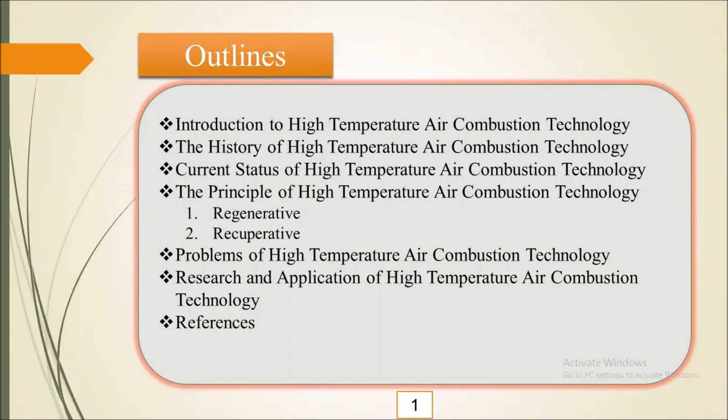So what is high temperature air combustion technology? Abbreviated as HTAC or HITAC, it is a process with which we are taking advantage of the heat present in flue gases after they do the work in a gas turbine, for example, or in a furnace, and which leave the furnace or the gas turbine with high temperature. So this high temperature has high enthalpy, so we are taking advantage of such heat to transfer it to preheat the air going to the combustion zone or combustion chamber.

This technology is very important because of its benefits. For example, it will save energy, almost 30% of the energy, because if we take, for example, the gas turbine, about 70% of the amount of heat supplied in the combustion is wasted in the form of flue gases to the atmosphere. So using such a heat exchanger will give us an advantage of saving fuel and energy. The second one is the flame stability.

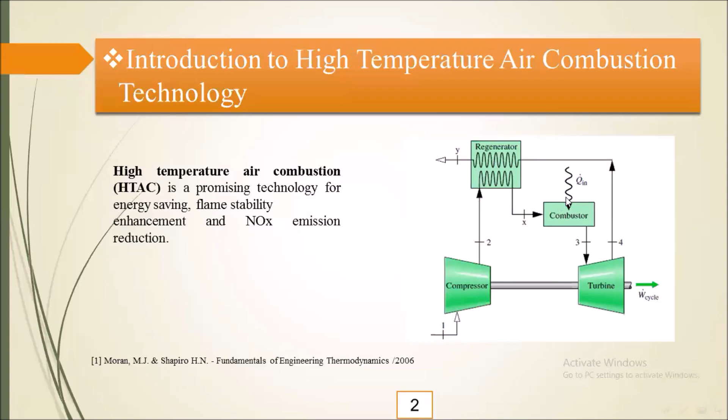So the history of this technology: it has been developed since 30 years ago, and it has been using low heating value fuels. So as we said earlier, the excess enthalpy present in the flue gases is wasted to the atmosphere. So we are making use of such enthalpy, and we are using it in a heat exchanger to increase the temperature of the air before it goes to the combustor.

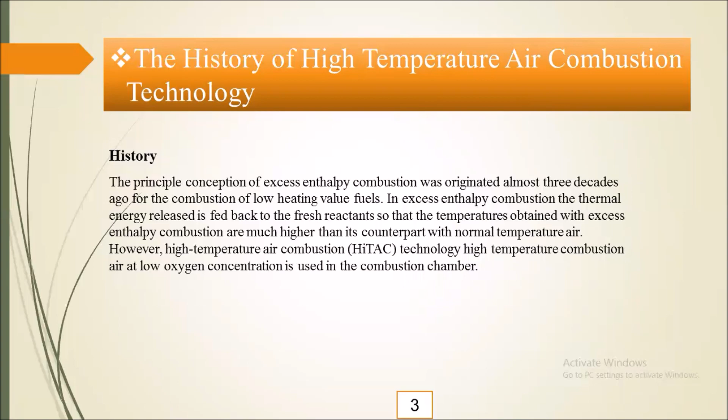So here let's talk about the current status of this technology. This technology is one of the promising combustion techniques that will give us a solution for the energy demand, as we know that nowadays the world is demanding energy and there is energy starvation in the world. So preserving such amount of fuel or energy will solve some of our problems.

And also because of the contaminations that pollute our planet, this technology will reduce the amount of contamination or pollution elements such as nitrogen oxide and carbon monoxide, as we will talk about later.

So what are the benefits of such technology? As we said earlier, it will save fuel consumption and thus save energy. Then it will reduce the amount of carbon dioxide.

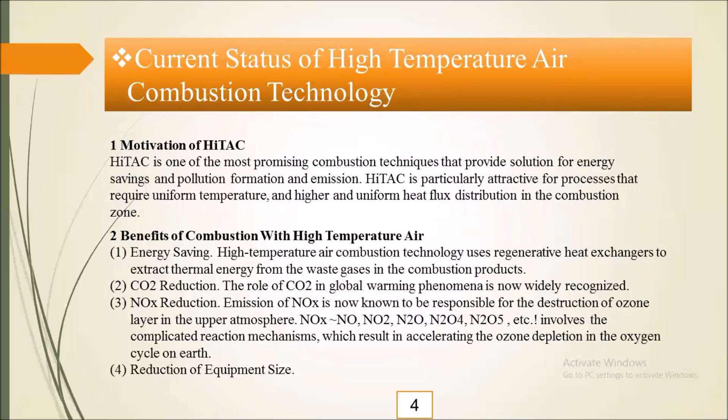So this is the basic principle of the HiTAC technology. As we said earlier, there is a heat exchanger which transfers the heat from hot flue gases to the lower temperature air. As you can see here, these diagrams illustrate the types of methods used with this technology: the heat recirculation methods, which can be internal or external, and these internal and external methods can be of steady or unsteady types, and the steady types have categories of heat transfer modes, which are

convection, and convection is the transfer of heat from the high temperature fluid to the lower temperature fluid in the form of convective transfer, which is due to the movement of the fluids. The second one is conduction, and conduction is transferring of the heat by the particles and the molecules of the fluid itself. The third one is radiation. Radiation is the transferring of heat in the form of electromagnetic or infrared radiation, and all these types can be used.

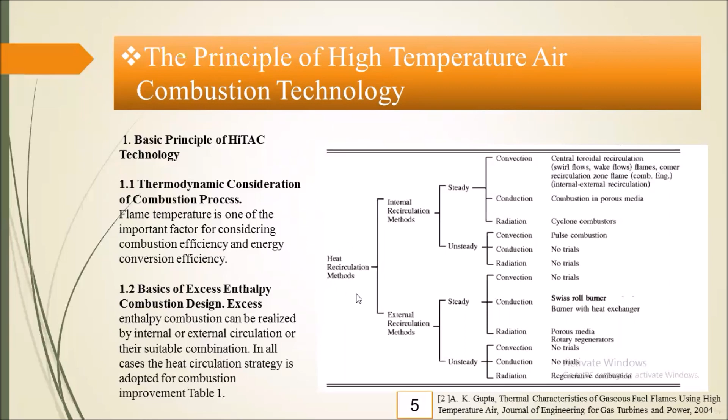So what's the method of high temperature air combustion technology? As we said earlier, around 70% of the heat of combustion is wasted to the atmosphere in the form of hot flue gases, and the temperature of the hot flue gases is between 400 and 1600 degrees Celsius, and this will decrease the efficiency and also increase the amount of fuel used in conventional combustion systems.

There are two types of high temperature air combustion technology: the regenerative and the recuperative types of heat exchangers. Heat exchangers extract the heat available in the flue gases and transfer some portion of this heat to preheat the air before it goes to the combustion chamber or the combustor. So it will save about 30% of the energy, and also it will increase the air temperature to around 550 to 600 degrees Celsius.

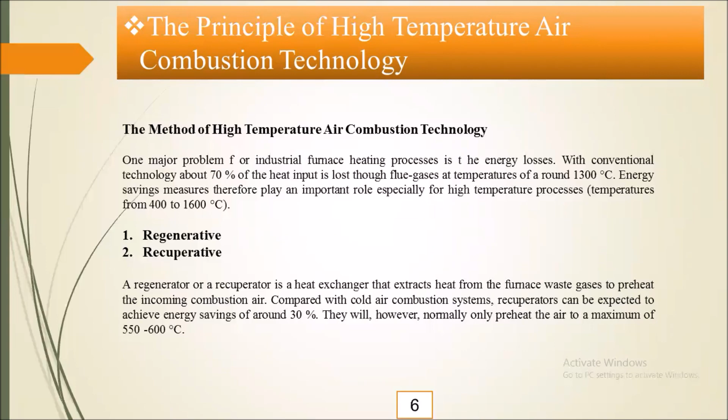But when we are using a regenerator, part of the flue gases heat is transferred to the air before it goes to the combustor. So it will increase the air temperature from T2 until Tx, and the amount of fuel used is reduced. Also, the amount of other flue gas elements is reduced.

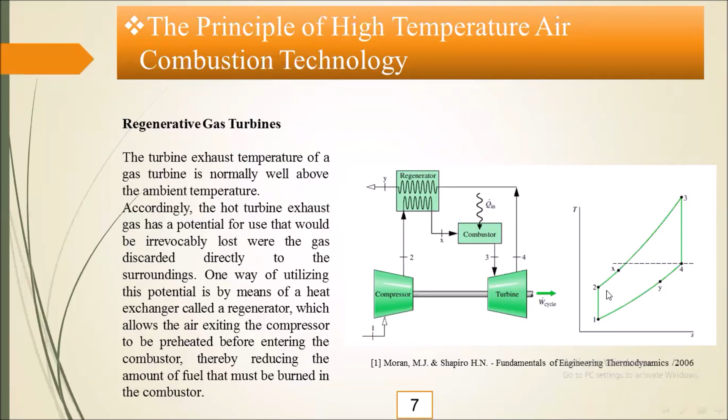So this is the equation of the effectiveness or the efficiency of heat exchanger, which is the difference of the enthalpy of the heat gained by the air or by the cold fluid, which is Hx minus H2 in our previous. This is Hx, the enthalpy at the point X after the air goes outside of the heat exchanger, and this is H2, which is the air before it goes to the heat exchanger or the regenerator, over H4, which is the enthalpy of the flue gases going outside of the gas turbine, minus H2, which is the reference for the temperature of the air or the cold fluid.

So the other type is the recuperative. The recuperative is the same type as the regenerative, but the difference is in the design, because regenerative can be mainly in the type of cyclone or circular heat exchangers. The recuperative is also some types of heat exchangers. As you can see here, this is a pump or a blower that blows the air into the combustion zone. But before the air goes to the combustion zone, it goes to the recuperative heat exchanger, which transfers the heat from the flue gases and gains some heat before it goes to the combustion chamber. So as you can see here, the flue gases are passing through many passages to transfer as much heat as possible from the flue gases before they are released to the atmosphere.

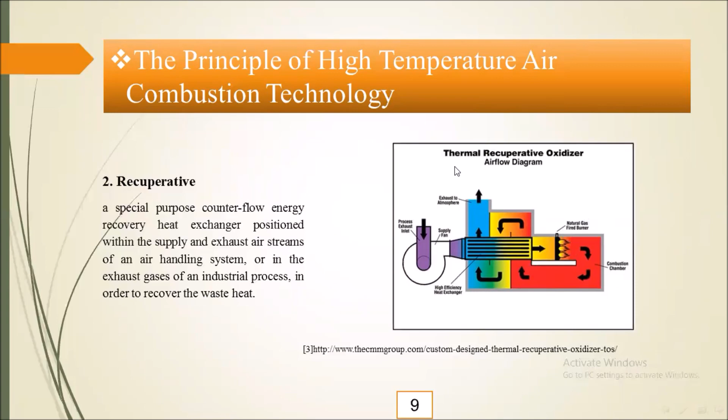So there is also another type of regenerative heat exchanger in the form of honeycomb type burners. This type of regenerative heat exchangers is very important because it will reduce the amount of pollution by about 25%. It will also enhance the efficiency, and it will give fuel energy saving of about 30%. Also, as we said, it will reduce the size of the equipment used in either a burner or regenerator in a gas turbine power plant.

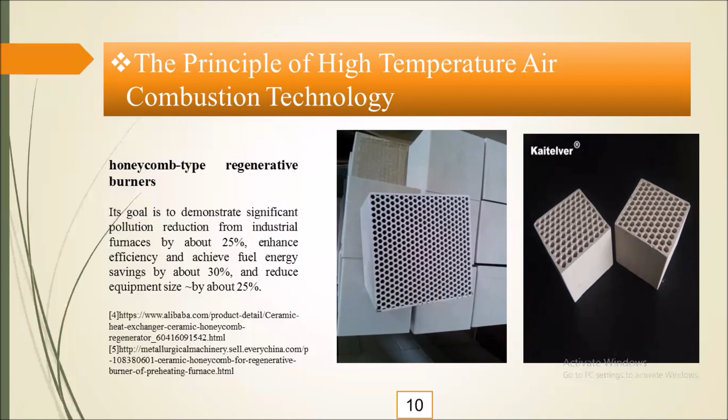So what are the problems? As we said earlier, this technology is very important and it has many advantages, but at the same time, there are some problems, most of them due to the need of novel materials which have to withstand high temperature in the regenerator or recuperator. As we said earlier, the temperature of the flue gases can be from 400 to 1600, and this temperature is very high. So we need, in the design and manufacturing of such devices, new materials that can withstand this temperature, so our regenerator or recuperative heat exchangers will work for a long time in our system.

Also, another problem is the frequent maintenance of the preheaters, because as we know the flue gases contain many contaminations and elements such as carbon monoxide, nitrogen oxide. It has moisture, and it has ashes and many other elements which are results of the combustion, and these elements can damage and contaminate the system, which will lead to our device not working properly, which leads to decreasing the efficiency of our system.

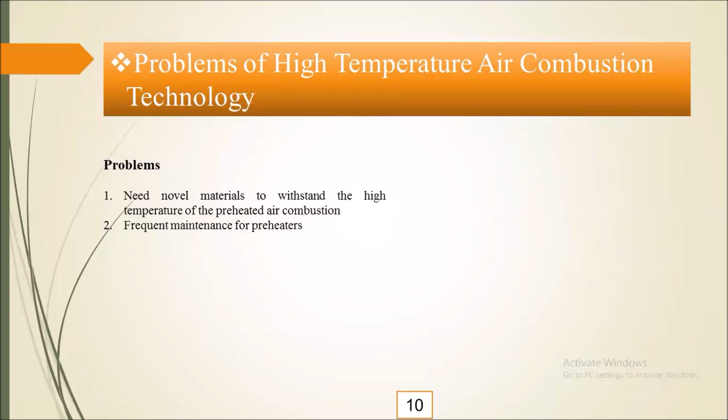So here, let's talk about the applications. But before that, let's recap some of the benefits and advantages of using this technology, the high temperature air combustion technology. We have mentioned that some of these benefits are saving energy and decreasing the size of the equipment. And here the heat flux is distributed uniformly, as well as the temperature. This is very important because if the temperature is different from one zone to another, this will lead to thermal damage of our system because of thermal cracking and many other problems.

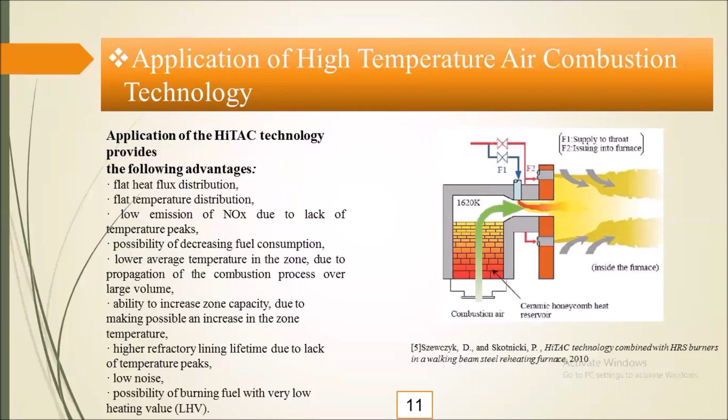Also, the possibility of burning fuel with very low heating value or low calorific value, such as heavyweight oil, such as mazout. So the application of this technology can be summarized in the following applications: regenerative gas turbine. We can use it in the regenerative burner, also the recuperative burner.